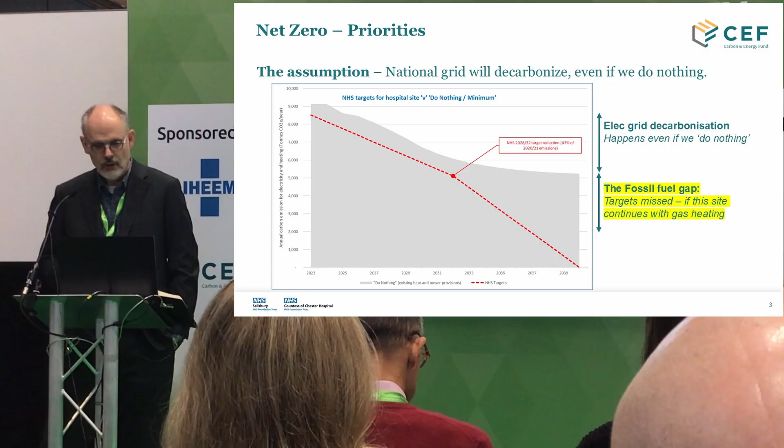Now, lots of people will probably now be looking at this and thinking, well, there's lots of reasons why we probably won't be able to do it or can't be able to do it. And the main reasons are probably money. We've enjoyed PSDS funding in the last few years, which has been excellent at kick-starting some really good schemes, and some of these have been presented earlier today and yesterday.

But there's no more PSDS money. That's now not an option. And so actually we're sort of thinking, well, how on earth then can we afford to do it?

We don't have any spare capital knocking around. And even if we could, if we have to start moving our heating away from gas and start moving it over to electrical energy, then the chances are we might feel we can't actually afford to operate the plant because of the big discrepancy, or disparity, between natural gas and electricity prices.

And even if we said, well, we're prepared to take a little bit of a hit there, the other main reason might be that it gets very complicated when we start to move away from fossil fuels, particularly if we're going to rely on electric heat pumps. We might need to do stuff with our infrastructure that would also mean lots of expense and maybe take some time to do. So it starts to get quite complicated.

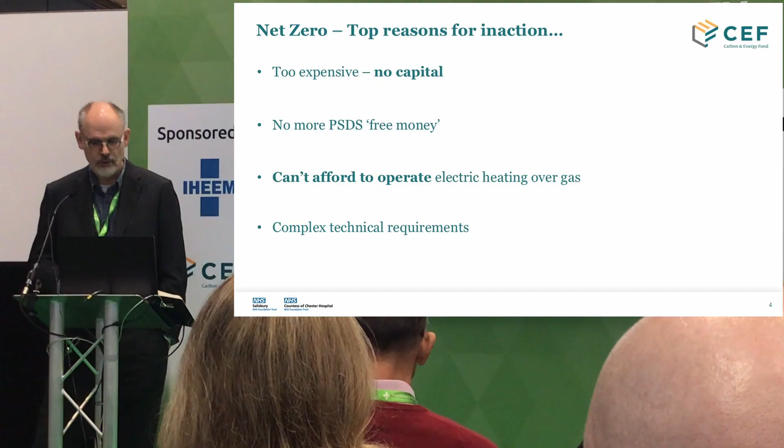So what I'm going to show you next is a series of slides which show the various mainstream routes that people are currently thinking of using to help decarbonise heat. Now, these slides are going to show some costs, some cost ranges, and I've taken those where I can from the library of CEF projects that we've done in recent years, and also ones that we've sort of got in the wings awaiting implementation.

As such, what I've also tried to do is take away some of the added complexities to those costs, because no project is the same from one project to another. But you can start to see some trends once you take out some of the project particulars that are driving the reason why some technology is costing X on one scheme and Y on another. Nevertheless, I want you to take these numbers as fairly generic. They're not necessarily the cost that you would pay on your scheme.

So here I've got a very simplified heat pump project, and what it's trying to do is replace a portion of the hospital's site demand. This assumes that it's relatively straightforward to place a heat pump on the site and connect it up to the trust heating system. If we were to do that, for each megawatt of heating capacity of plant, the upfront capital is going to be somewhere around 2 million for a very simple heat pump scheme. So that's about 2 per megawatt.

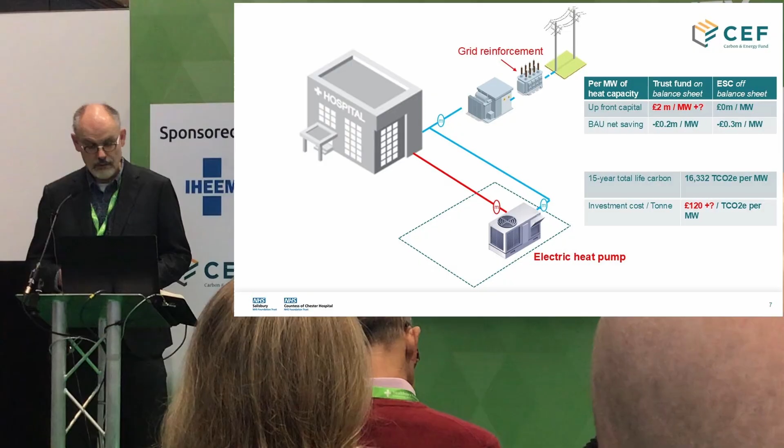It looks like we're going to have to take a hit on our revenue. Now, not only are we probably unlikely to be able to take a very big heat pump without doing anything on the electrical infrastructure side, the chances are we can't use that heat from the heat pump, particularly if it's an air source heat pump, without doing something to our heat side.

And usually that means we might need to make that either more efficient, and if it's a steam system, the chances are we're going to have to de-steam the site as well. Now we're talking about spending lots more capital - we're well over double where we were. We're now at about £265 per tonne per megawatt. So heat pumps, you can see, are potentially solutions that gradually get more expensive, the more complicated, and the more stuff we have to do to try and make them work.

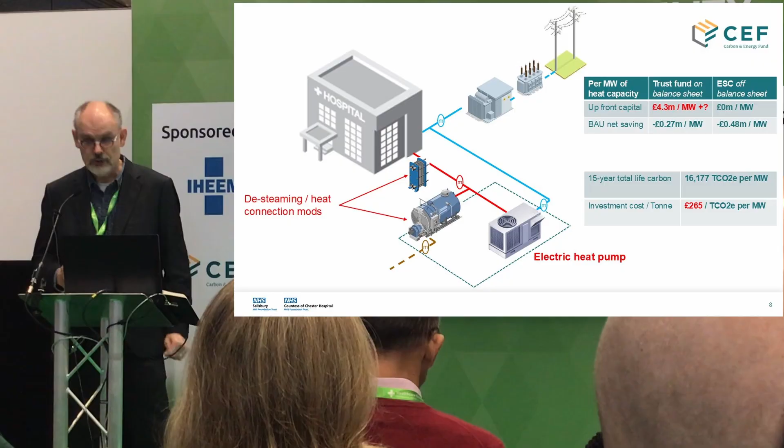What else have we got in our palette of decarbonising solutions? Well, increasingly now we're looking at deep geothermal. Deep geothermal is the exciting opportunity, and I think we've seen a few presentations in the last couple of days around deep geothermal.

Now this is a solution that would require you to drill down, usually at least 2 kilometres, maybe more, below the Earth's surface and pull out some hot water. Hopefully that water is hot enough that we can use it directly into our heating systems. And crucially, we're not going to be using as much electricity as we would have been using if we'd used an air source heat pump, for example.

So, but even so, you are talking about quite a big capital outlay with deep geothermal schemes. And it's quite a range, because it depends a lot on risk and where that risk is placed. So you can see, even with this solution, I'm still probably going to be somewhere around £180 per tonne as a minimum.

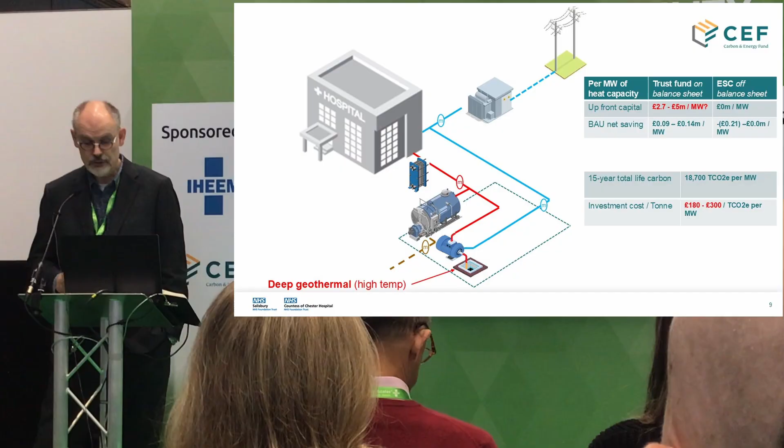With deep geothermal, it also depends on how hot the water is that you pull out of the ground. It might even mean you have to top the heat up with a heat pump. So our friendly old heat pump has appeared again, and that adds more capital, but our water wasn't as hot as in the previous example. So we have to spend more energy to top that water temperature up so we can use it in our hospital. Depending on how big that heat pump is, we might even end up having to uprate our electrical supply as well. So now you can see the capital value and the investment per tonne of carbon is increasing even more.

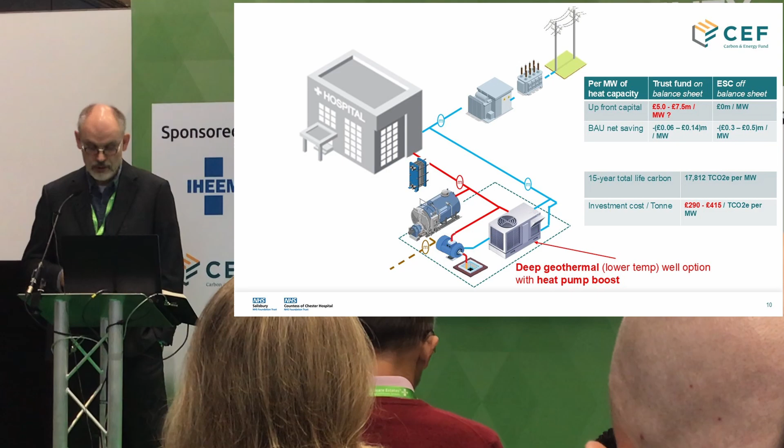What else have we got? We've talked about hydrogen a lot, and hydrogen is, as I'll explain, a potential solution for some sites. If hydrogen can be used in a similar way - piped hydrogen coming up to the site - we could run a reciprocating gas engine on the hydrogen that won't emit CO2, but could generate a revenue stream, giving us heat and power from the hydrogen. It should start making positive savings in the same way we were used to seeing with natural gas, on the basis that we get the hydrogen at a similar price per kilowatt hour as natural gas.

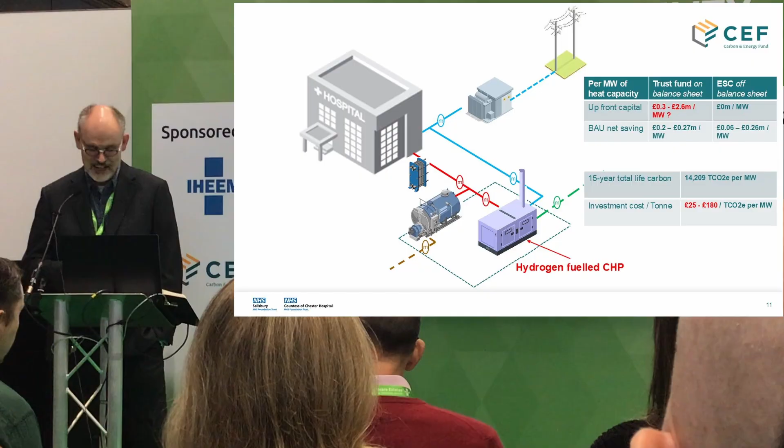That is potentially possible if that hydrogen meets the government's proposed hydrogen standard - they will subsidise the price per kilowatt hour for the hydrogen versus natural gas. And who knows, if we have enough hydrogen, maybe we could run some boilers off of that as well.

Other options might be, particularly if we're not anywhere near hydrogen, to look at district heat connection. District heat connection will be dependent on where your hospital is in relation to perhaps other big energy users.

Those can show quite good levels of return - they can certainly get somewhere near positive. But it really does depend on what you need to do on your side of the connection to that district heat scheme. Most district heat schemes will be looking at specific criteria for the heat they deliver to you at a certain temperature, and they'll want you to return the water back to them at a maximum temperature once you have used that heat. So to fulfill that criteria, you might have to spend money to make your site compatible with the district heat connection - that's why you see another range in potential capital that might need to be expended to make a district heat scheme work.

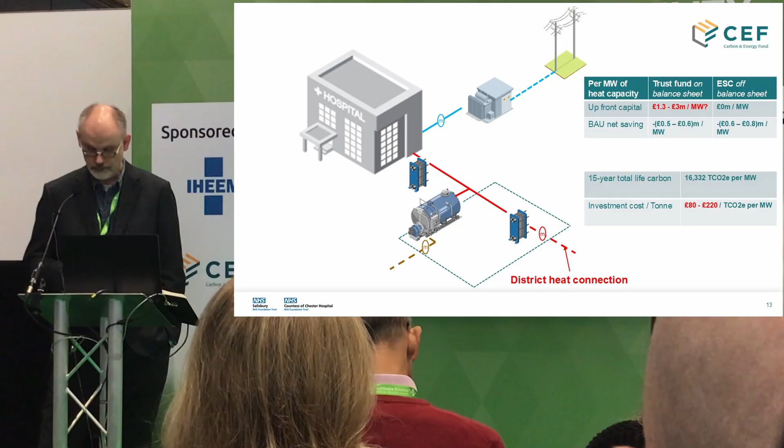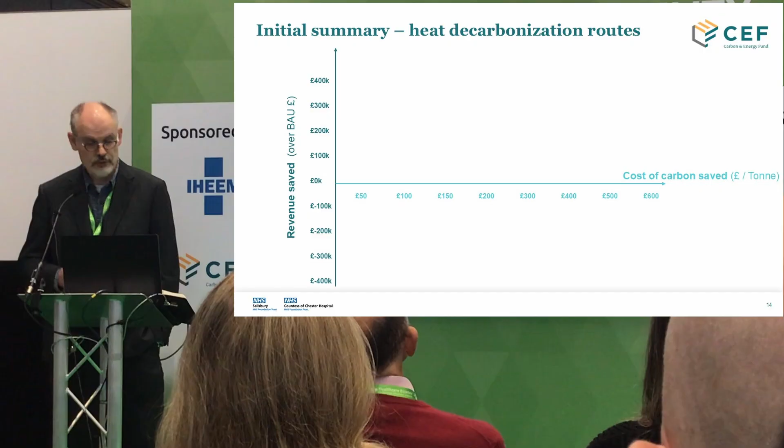So let's look at how these things compare together. Remember, what we're particularly interested in is revenue - in other words, are we going to be at a worse position in terms of how much we're spending day to day on energy, versus the amount of capital that might need to be invested to deliver the carbon savings we're seeking. This graph attempts to show this.

As soon as I plot the heat pump options, particularly the air source ones, we can see that whilst we can potentially get quite a long way along the x-axis in terms of spending a lot of money to save carbon, it looks like we'll always be in a negative revenue position.

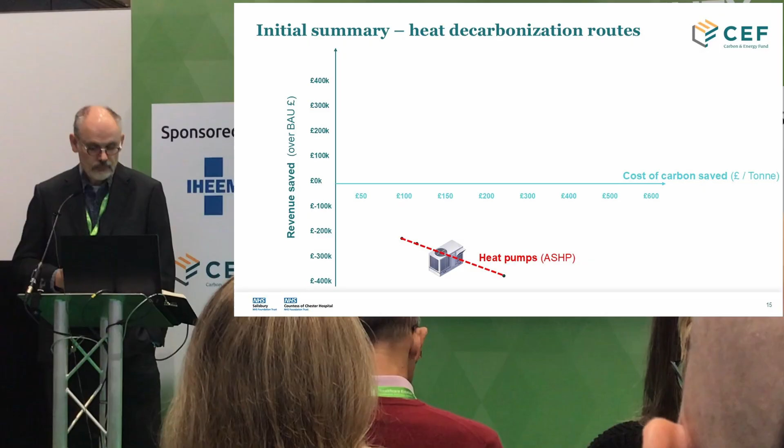If we compare that to the deep geothermal option, we can see that depending on the amount of capital, depending on where you are, there is a potential for us to be looking at a positive revenue position. But it will also depend a lot on drill costs and everything else and where that risk sits, so there is a chance it might be negative - particularly if we have to put heat pumps in to boost that heat, which makes it less likely to be a positive revenue generator.

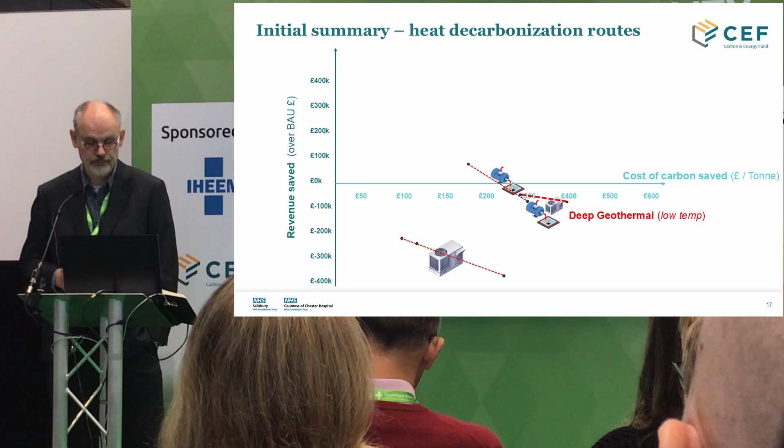So the hydrogen-fueled CHP is showing a positive revenue - a very good positive revenue - because it's generating electricity on a cost of hydrogen pegged against the cost of natural gas, and there is, as we shall see, a big difference between those two values. So we know we can generate positive revenues.

And indeed, if we ran a boiler, we would get a similar position, because we would get the carbon savings now at a cost comparable with running it on natural gas. And district heat, again, should normally be a positive position there, but that's at risk of turning negative or perhaps even neutral, depending on the amount you might need to invest in your site to work with the district heat scheme.

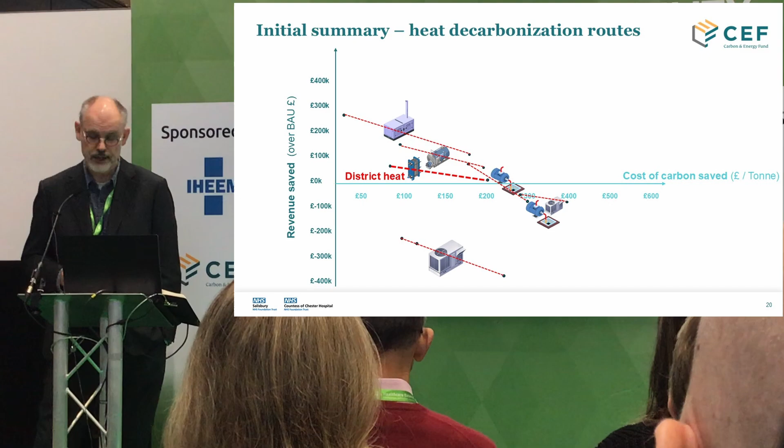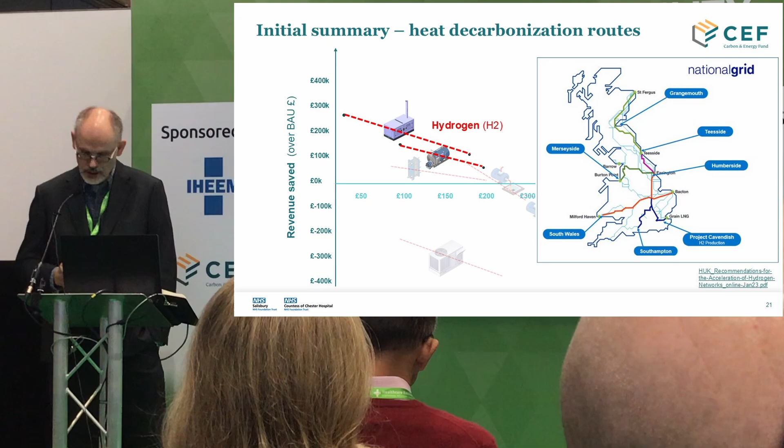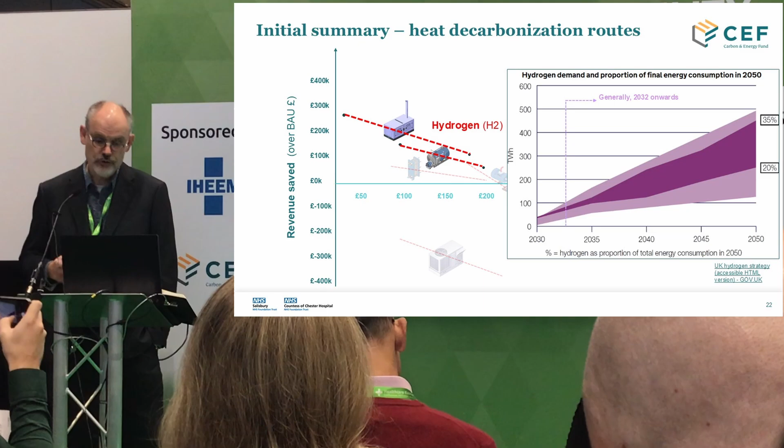And this graph is showing, it's from the UK government's hydrogen strategy, and it's showing the predicted rollout of hydrogen and the proportion of final energy consumption that it might achieve by 2050. You see that really nothing much is going to happen until we hit the early 2030s, and that's when the first projects of hydrogen networks start to roll out.

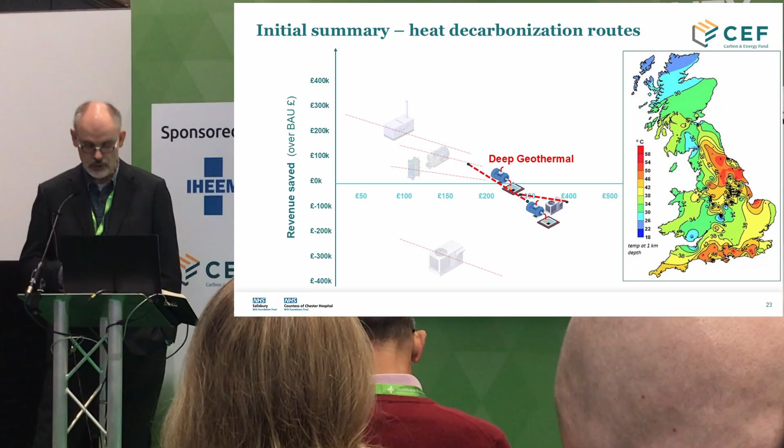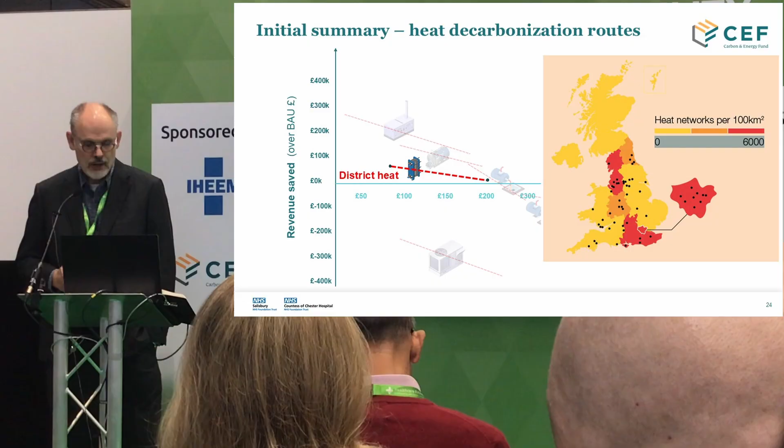Now, district heat to date has relied quite heavily on funding from the government through the Green Heat Network Fund. We've got a sort of guarantee on that for drawdowns up until around 2027, 2028. Not quite sure what's going to happen after that, but the idea is we needed that funding to start to boost solutions, to start increasing the likelihood of those occurring. But I don't think necessarily the Green Heat Network Fund is going to be something we can rely on perhaps in the slightly longer term now.

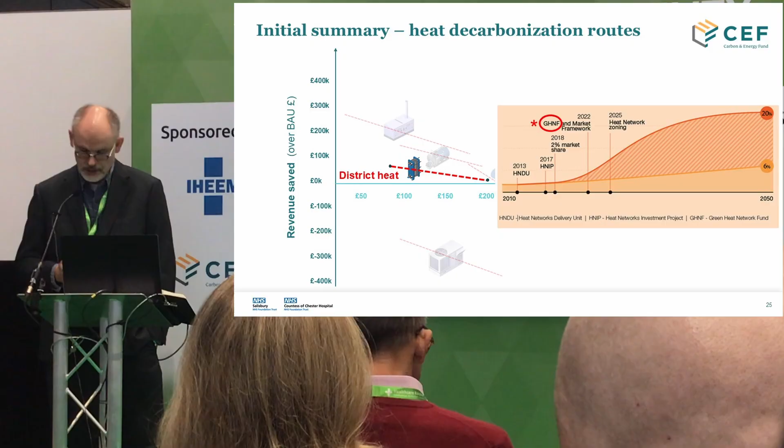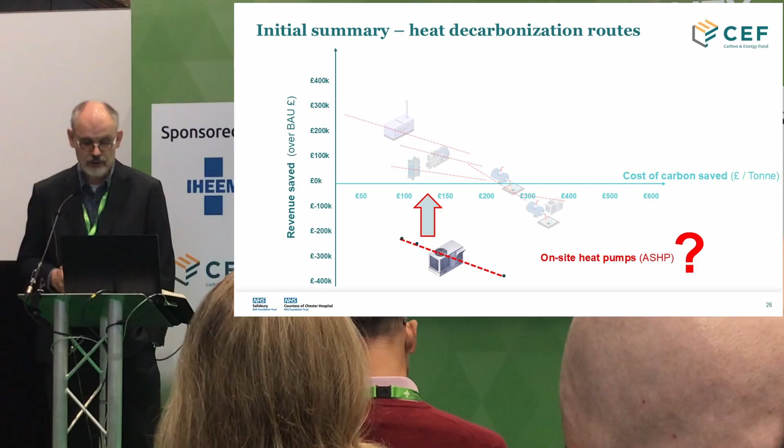So where does that leave our humble heat pump? If you're not in a geothermal favourable location, or you are not going to be in the first wave of hydrogen rollout, what can we do? Heat pumps do have some really good things going for them, because they are basically nice little boxes that we can place relatively easily on our sites.

So the thing about heat pumps is how well we can, or how efficient we can make them. If we can make them very efficient, then that negative revenue position that I was showing you earlier can potentially go up. We can hopefully get somewhere towards at least a revenue neutral position.

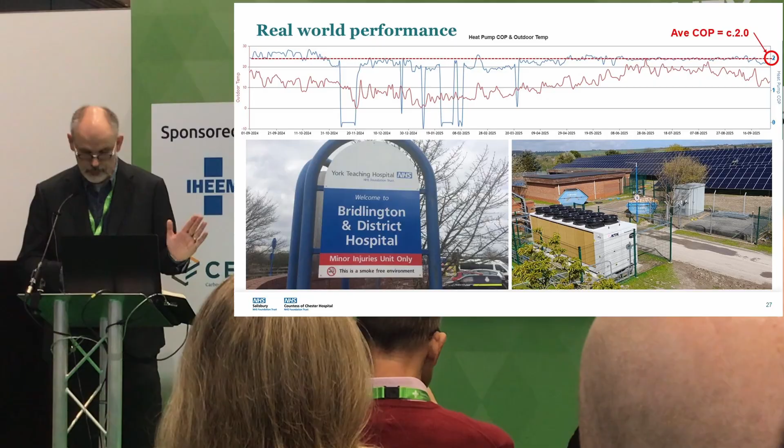You can see on this particular example, the neutrality was around a COP of around 3.25. At that point, we know that the cost of running that heat pump is going to be equal to the cost of running the natural gas. Now that figure might change from site to site depending on how hot you need the water out of the heat pump and depending how efficient your gas boilers were. But trying to get efficiency from heat pumps is key.

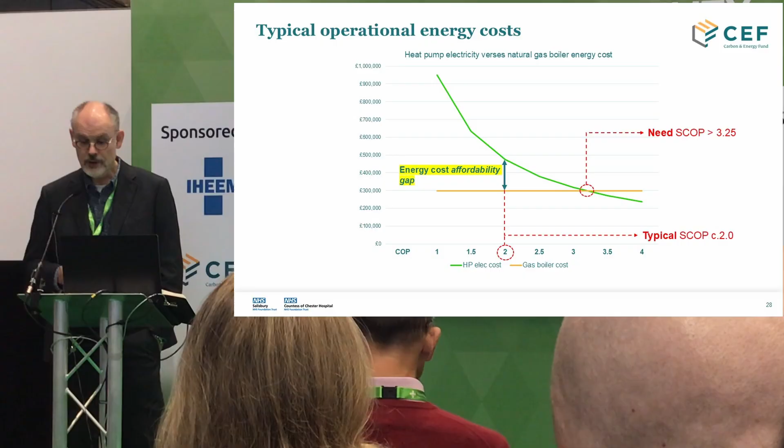What about if we've managed to do as good a scheme as we possibly can, but we're still in this position where it's going to cost us to run that heat pump?

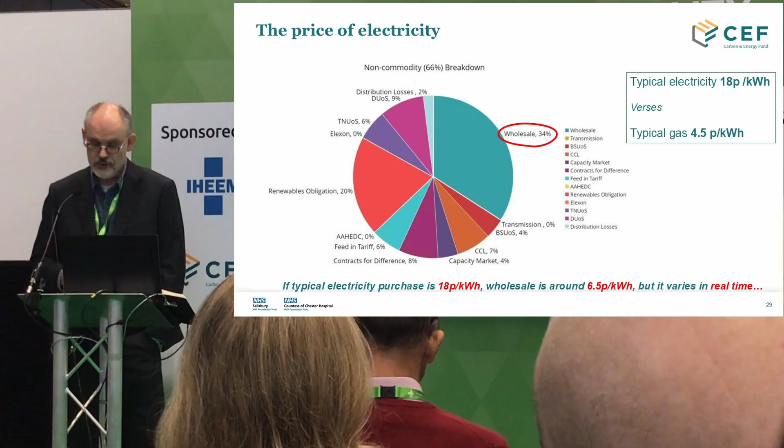So what we end up with is a position where electricity is somewhere between 3.5 and 4 times the cost of gas. But the wholesale price of electricity, so if it was 18p at 34%, it might be around about 6.5 pence for the wholesale price. That's not a million miles away from the cost of gas. Is there anything we can do about our cost of electricity?

Well, increasingly we're now getting into an electricity market that is a lot more volatile than it once was, because it's now relying a lot more on renewables to deliver the market price of electricity. And what we find when we look at the day-to-day cost of electricity, it's a bit like the stock exchange, or probably a lot worse. If you bid to buy some electricity on one day, you could be paying 30% more than the day before. And that's because it really depends on how much wind is currently generating, how much other renewables are currently on the national grid at any one time.

I have a domestic tariff where from time to time my electricity supply company says, tomorrow or at the weekend, we're not charging you for any electricity. You can fill your boots because it's zero. And that's because they've purchased ahead on the electricity market at very cheap rates. And they know that in order to take advantage of the next day, they're going to need to be making some headroom for more energy purchase. So this sort of flexibility in energy marketing and energy purchase is becoming more and more prevalent.

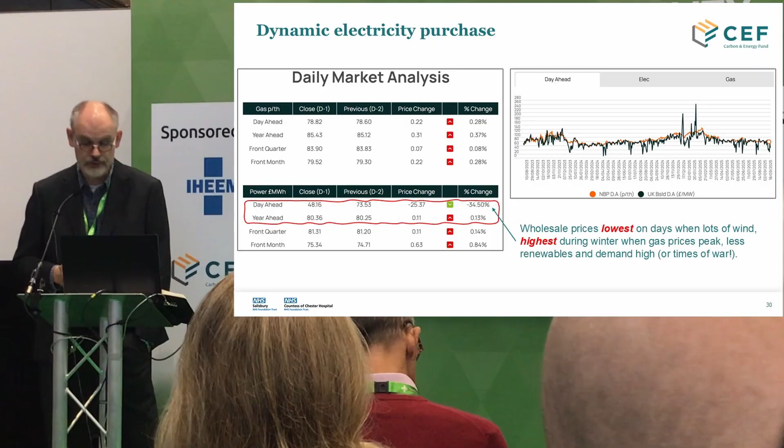And when you start to run some numbers through what we call a dynamic purchase, so this would be perhaps day-ahead purchasing on the market, you can see that over the year, depending on the amount of risk that you want to take, in other words, how much of your electricity purchase you're prepared to buy on a day-ahead basis, you start to see some improvements on those revenue gaps, in particular for heat pumps.

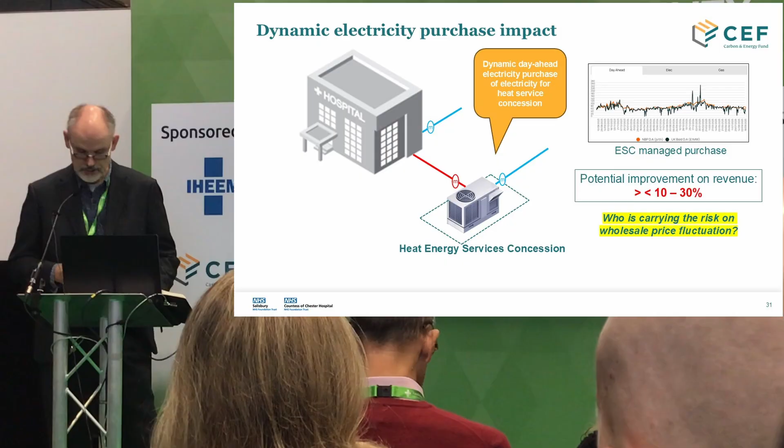Now, there are other ways of perhaps getting some assurity or stability on electricity purchase. Obviously, buying ahead, a day ahead, is a risky business, and it's not necessarily something that NHS trusts want to be involved with. You might have heard of sleeving and power purchase agreements.

So here we're talking about an investment in some renewable energy. It's probably going to be renewable energy somewhere off-site. It might be that you've got some land on your site, and perhaps you elect to invest in that and feed through to the grid and try and sell your power direct on the grid. But that's unlikely. It's more likely that any form of renewables you build yourself on site, you want to connect directly to your usage.

But what if you haven't got all those roofs that we were looking at in the previous presentation available for solar PV, or you're a very big site with large demands of power? You will need to invest perhaps in something off-site. And that's what a sleeved solution allows you to do. It allows you to make an investment off-site in a renewables project, and in so doing, the amount of electricity that renewable project delivers onto the grid will replace that wholesale price that we were looking at earlier.

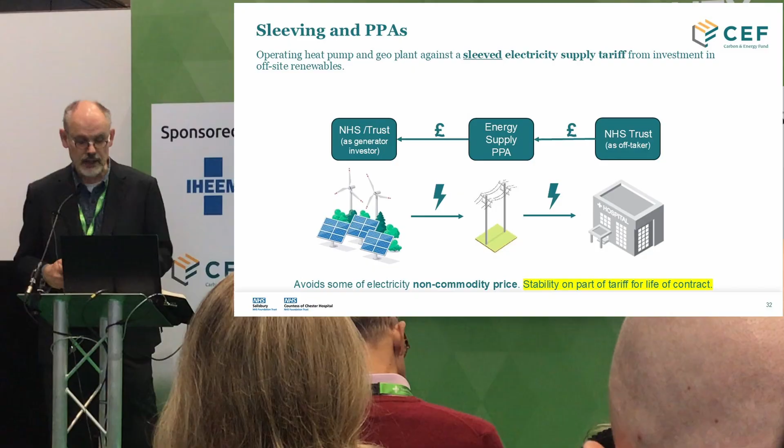Now, you've made that investment, you know what the returns on that investment are, and you know what that renewables project is going to deliver over its life. So you've now got some form of assurity on your proportion of wholesale price. So no matter what happens on the market, generally, if we have another war in the Gulf or something like that and electricity prices go up again, the price you've invested in for your piece of renewable energy scheme remains solid because you've made that investment. That's not going to change. And that's the advantage that a PPA style agreement will give you. It gives you some form of stability on price.

So again, looking at how that might play out on a typical scheme, we can see, depending on the level of investment - and remember, the investment level doesn't necessarily have to constitute the whole of your energy usage, we can draw a ring around that to just deal with the amount of electricity you need for your heat pump project - there's potential, depending on the value of that investment, to get an improvement on revenue somewhere between 20 and 40%.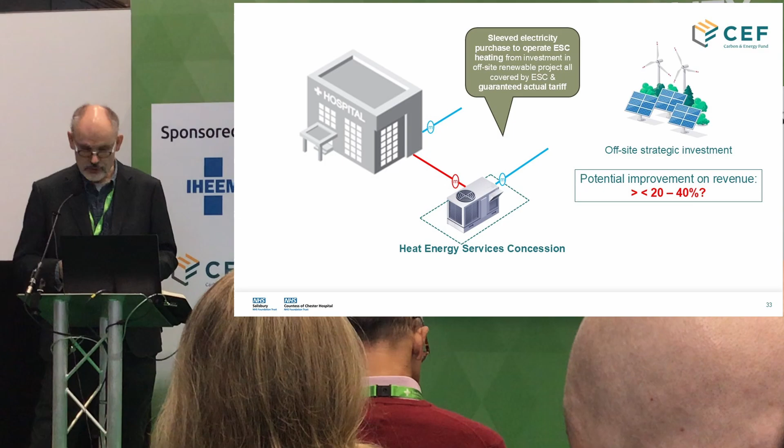In fact, if you were to put that renewable electricity, the power purchase agreement, or the dynamic purchasing through your heat pump, you could also put it through your geothermal solution, so that would start to look a lot more healthy as well. Anything that requires electricity to generate carbon savings could adopt that sort of strategy.

There is already a document in place, the framework agreement with the NHS, that covers PPAs and a certain amount of risk management with dynamic purchasing, but that's limited to a degree. So we need to understand how that might work on a scheme.

I'm realising my time is probably up, so I'm going to skip these slides a little bit faster. In terms of electrical capacity, we were worried about having to invest a lot on the capacity of the electricity needed for heat pumps.

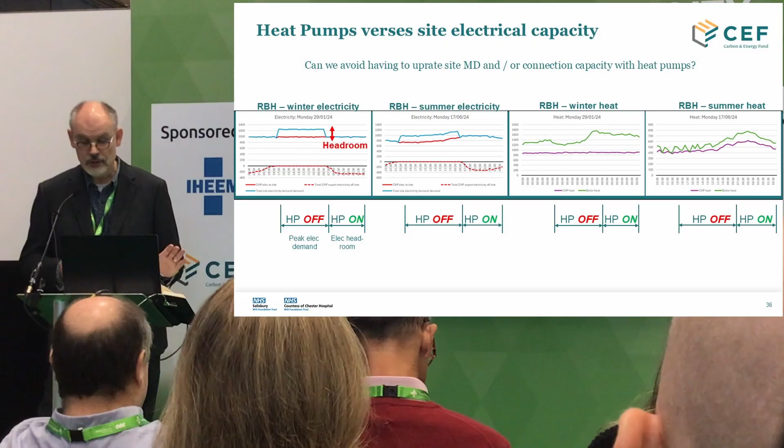In order to do that, we might need to invest in batteries, electric batteries, and maybe thermal stores. We have a couple of schemes that have done that. The price of batteries is going down at quite a rate, so we see batteries as perhaps being something that is going to be used more and more often.

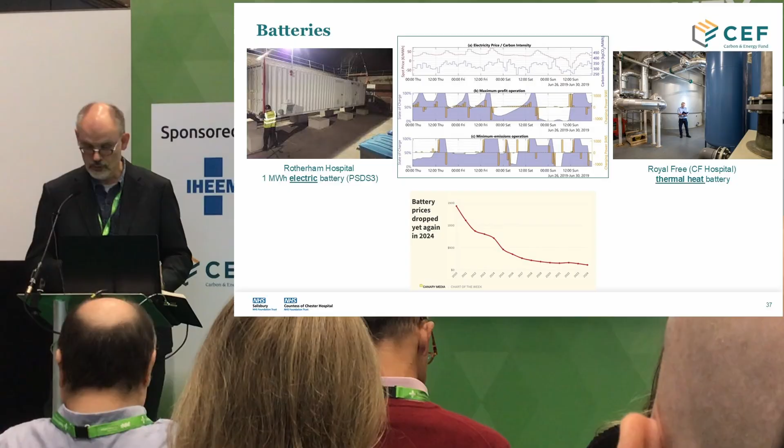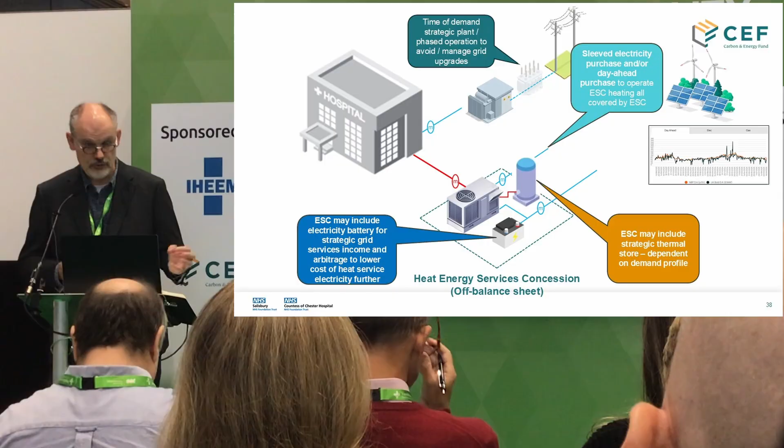If we marry all these things together, we start to get a solution that takes on board available storage technology and the ability to purchase strategically the energy that we use. We can wrap some of the risk of doing that around a services style agreement, which can then start to guarantee heat within the level of risk you're prepared to work with, and it starts to become a lot more affordable.

And this is probably where things are going, because the market is definitely becoming more and more dynamic, and solutions need to respond to that. But they need to wrap the risk away from trusts so that it's handled by the experts.

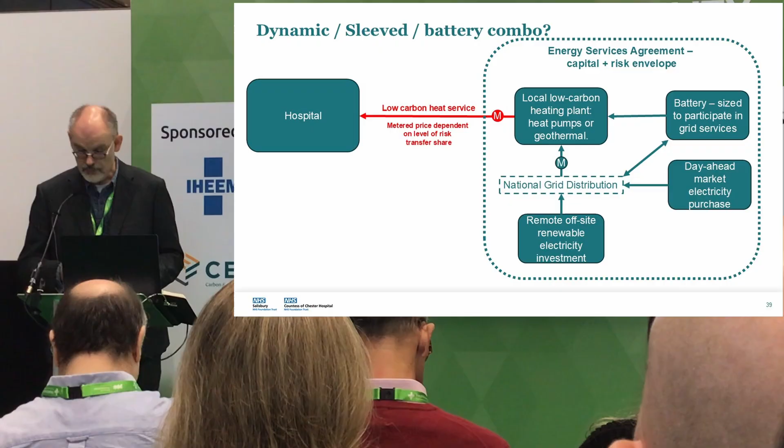So in summary, if we have something that's too expensive, and we aren't getting any free money, we need to look at ways, firstly, of ensuring the efficiency of plant, but secondly, we need to be looking at the energy use and how we can make best use of that emerging market of dynamism and PPAs, etc. And we also need to look at how we manage the operation of that plant through strategic use of storage, whether that's electric or thermal.

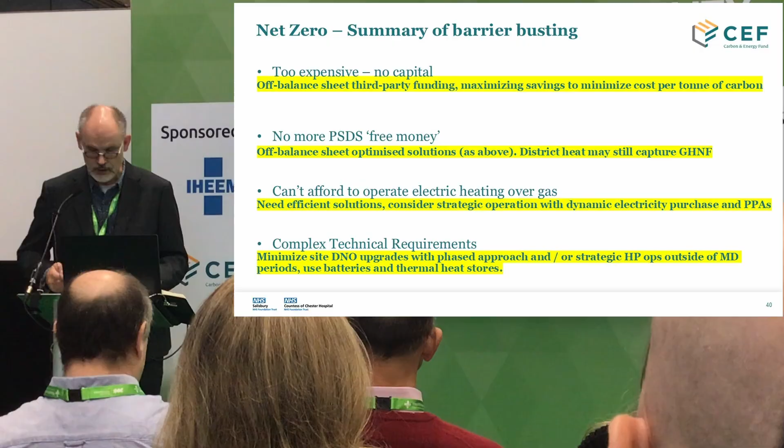So we might find situations where we have some funding, and I think we've got some level of funding from PSDS on the Countess scheme that's helping to make that scheme as a whole more positive. All of the examples I've shown you don't include any PSDS, because there is no PSDS going forward.

This is why I'm pushing what I'm saying here - if we don't have any free money from the government, we have to look at other ways of trying to get to solutions that try and get us at least to a neutral position, ideally positive. But if someone's got free money, then great, that's going to make that look a lot better.

But schemes can be looked at on a scheme-by-scheme basis, can't they? They'll all have their different... those graphs are generic. I've tried to take out some of the inferences, but this is true - there's no such thing as a typical scheme. Most schemes have things happening on them, or situations that drive costs one way or the other, which is why we need to always look with an open mind on what's available and what works best.